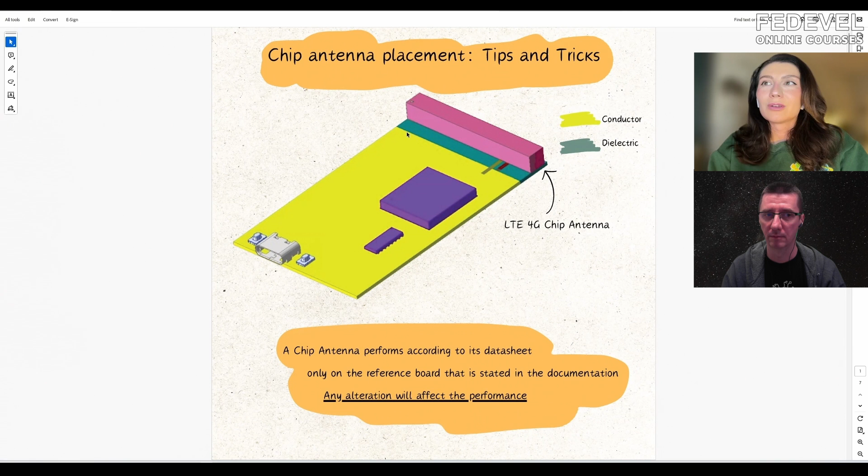We have this antenna in simulation, the box of the antenna, and the reference board that they recommend in the datasheet. And here comes the first very important thing about chip antennas: a chip antenna only performs according to the datasheet when placed on a reference board that is specified in the datasheet, and also when placed exactly as specified. Any alteration that you do will affect the efficiency and performance of your antenna.

Okay, I would like to interrupt you here. So it basically means when someone buys a chip antenna and places it on the board, they will be like, oh, I placed the antenna on my board. It's not so simple. It's not like connecting external big antennas.

Exactly, you're completely right. That's why I always really want to warn people about chip antennas, especially those who are maybe a bit far from antennas, just some engineers or amateurs who want to have some antenna in their device, and they think that a chip antenna is very good. You can buy an antenna that claims it works, for example in this case LTE 4G antenna on the dual band, but then you really need to read the datasheet.

So in this example, today -- last time we were talking about Wi-Fi and Bluetooth, and today we are talking about cellular antennas -- we will see very good effects of everything I'm talking about, like PCB effects, some environment effects on the antenna, and we will also see it on the dual band antenna, on a lower frequency, and how everything affects the higher frequency as well.

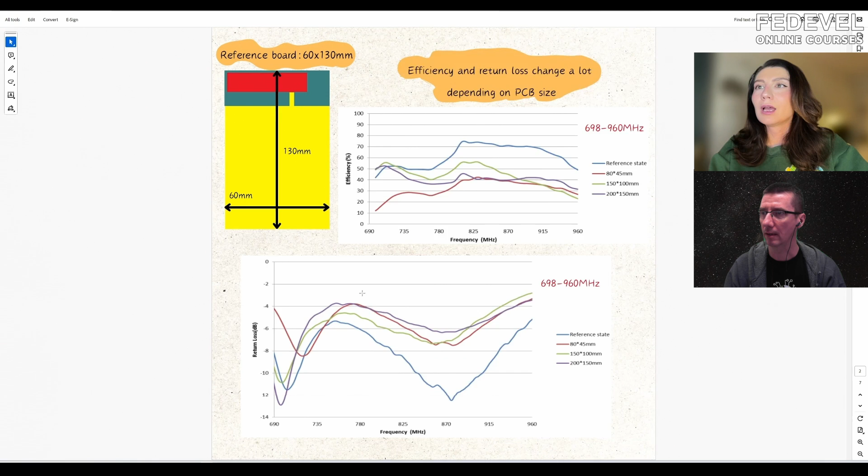So how is it possible that this one antenna can work on two different frequencies? Is it some kind of special antenna? What is inside of this antenna? There are a lot of multiband antennas, and PCB antennas also can be designed to be multiband.

It's not magic - you just need to have several resonances happening in your antenna. So it's completely normal to have several. You can have even 3 bands in one antenna. Of course then it gets harder and harder to match every band to work perfectly, but that's another challenge.

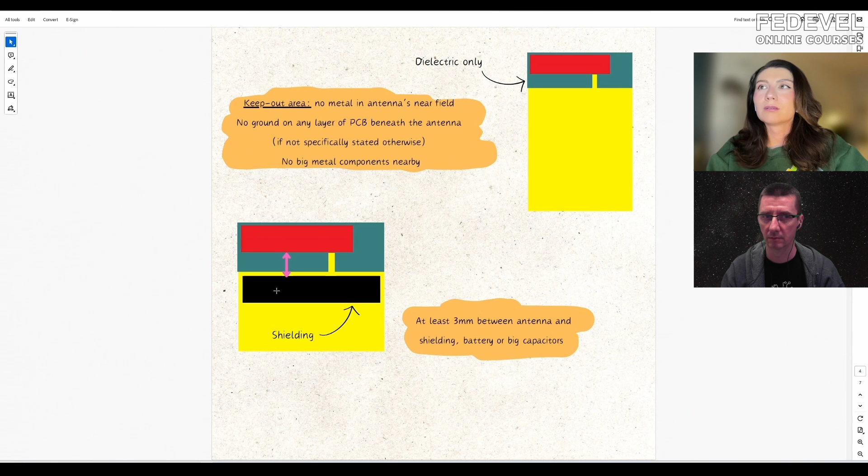So yeah, it's really just check really carefully the datasheet when you deal with a chip antenna, and as well you really need to be cautious about placing any metal elements like shielding, batteries, big capacitors, or other metal elements near the antenna. At least several millimeters should be between your shielding or battery and the antenna, so it's not in the antenna's near field and does not disturb antenna performance.

And best placement for chip antenna, usually for this type of antenna, when you have omnidirectional radiation pattern and when you don't have any ground plane beneath the antenna, the best placement is in the corner on the shorter side of the PCB.

So here we have our PCB, no metal here on the blue area, metal here on your ground plane or on your PCB, and then we place the antenna in the corner, this corner or this corner. This is considered the best and most recommended placement from any vendors. Usually all vendors who do similar types of chip antennas recommend this kind of placement, because then your antenna can radiate using all the length of your PCB.

And here you can see some not optimal solutions. In this case, the antenna is placed on the edge, but on the longer side of the PCB, compared to here on the shorter side of the PCB. So it cannot use the whole length of the PCB to radiate more efficiently.

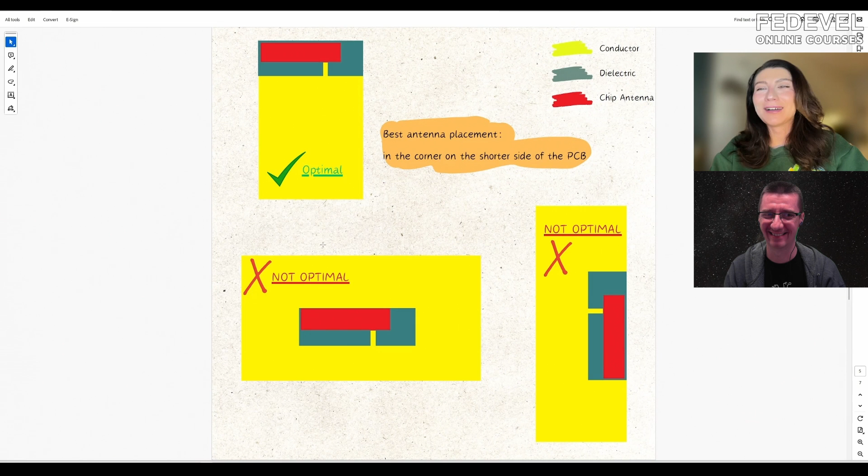And in this case, it's just funny for me, because why would you place an antenna like this? But we have seen this. Yeah, so with the PCB antenna, yes, unfortunately, but I haven't seen it with the chip antenna yet. Maybe after this video, I will be surprised again and see some other.

Yes, okay, and talking about feed, most of the antennas that exist, the chip antennas, they all match to 50 ohm, and they require your feed to be 50 ohm.

So if you don't have 50 ohm feed, then you will have losses, and you will see it on your return loss, this graph that we looked at before. That will just result in more reflections in your system, and will reduce efficiency.

Sometimes when you have your antenna, it's worth having a matching network, so placing several components before the antenna. Here we have the feed of the antenna, and we place several components in our matching network. It helps to tune the antenna back a bit.

So if we change something, add some enclosure plastic, or change the reflector or change the position, it can help, but it's not some kind of super saver, a miracle. It only helps a bit, and it's very limited, and it will bring losses to the system. So that also needs to be cautious about, because every element, nothing comes free, right? So every element has losses as well.

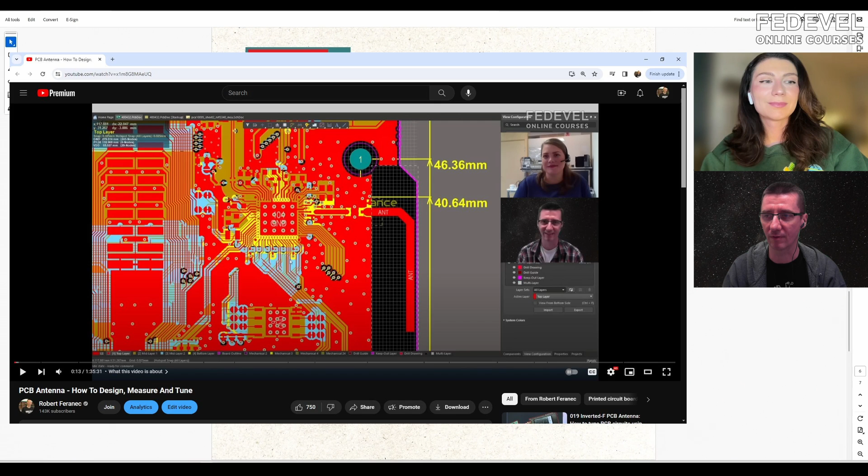Yeah, that's good. I mean, that's also always good to learn more about these matching networks. It sometimes helps a lot with antennas. And here we have some examples of what a matching network can look like. Oh, you have a few things here. Yeah, okay.

Just one minute about that. So for a simple antenna, one band, for example Wi-Fi, Bluetooth, GPS, or so, we can sometimes get by without any matching network if the antenna is simulated and done in a good way. Then we can get by without anything, and sometimes it's like 1-2 components required in the matching network.

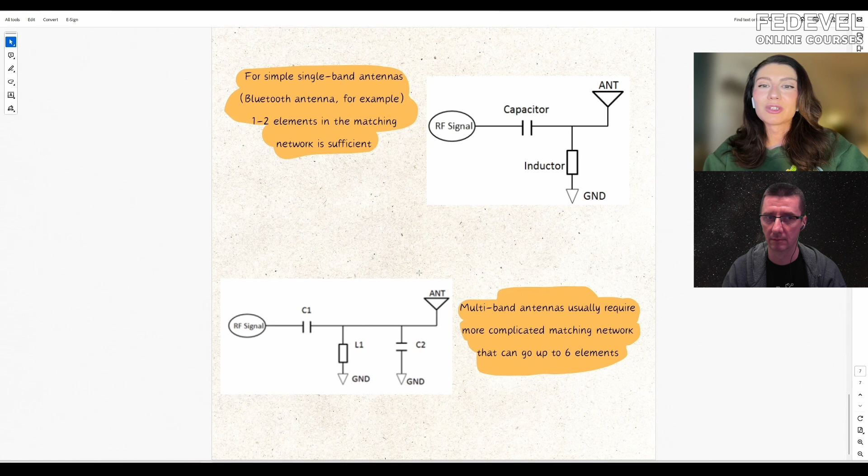For multi-band antennas, for example this dual band 4G antenna, a bigger matching network is required. Usually it's, I would say, 4 elements, sometimes 5, because we need to really match both bands. It cannot be just one band matched well and then another band suffers from that.

So you really need this capacity in your matching network to accommodate both bands. Now we can go to simulations, we'll talk about this a bit later. In the beginning we have our simulation that I just showed, with the antenna on the reference board. What they recommend to have, right? They recommend to have...

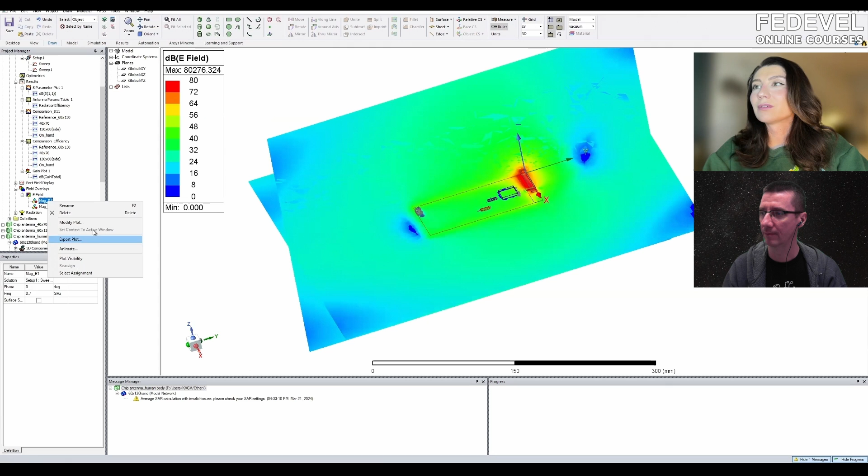130 here in length and 60 in width. Can I interrupt you? So where did you come up with these numbers? Do you have a data sheet we can look at, or what?

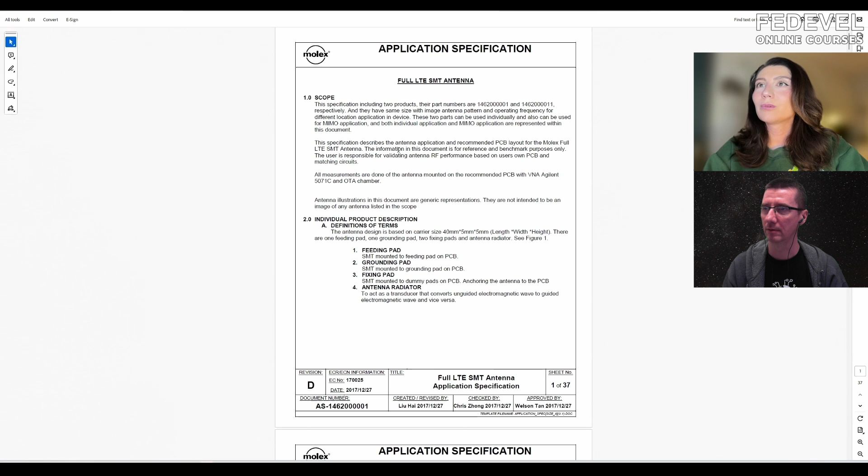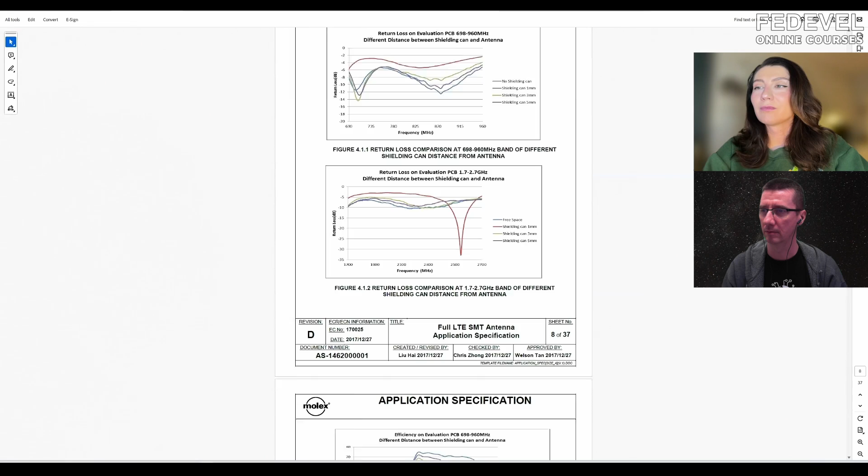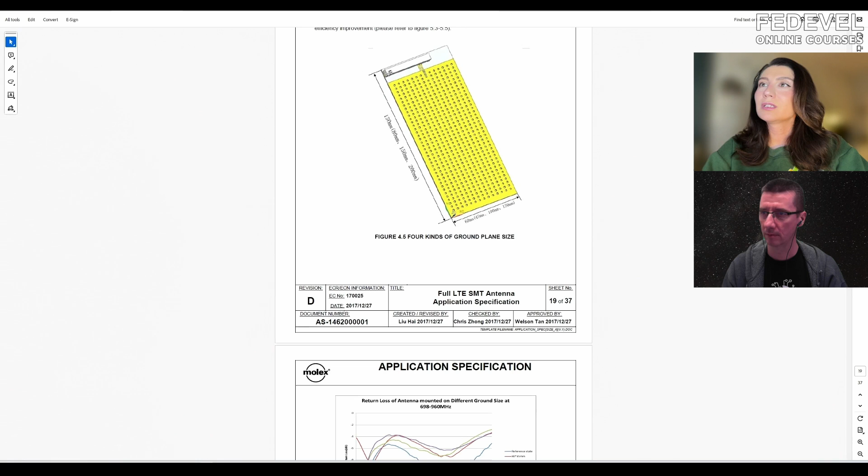Oh yes, right, they have a data sheet for this antenna, and they specify a reference board always for every antenna. They have reference board, radiation patterns, everything here. In this case, for example, they have 130 as reference and 60, and they also specify how much keep out area you need to have here. So this is a good application note.

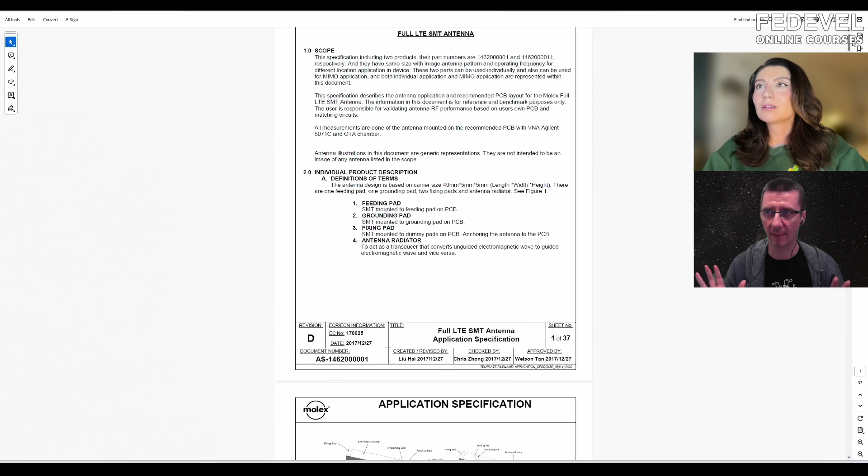So when someone is selecting a chip antenna, they should go with a manufacturer with good documentation. Yes, for sure. So here, for example, they have these 2 antennas, double in width, because they have a MIMO application.

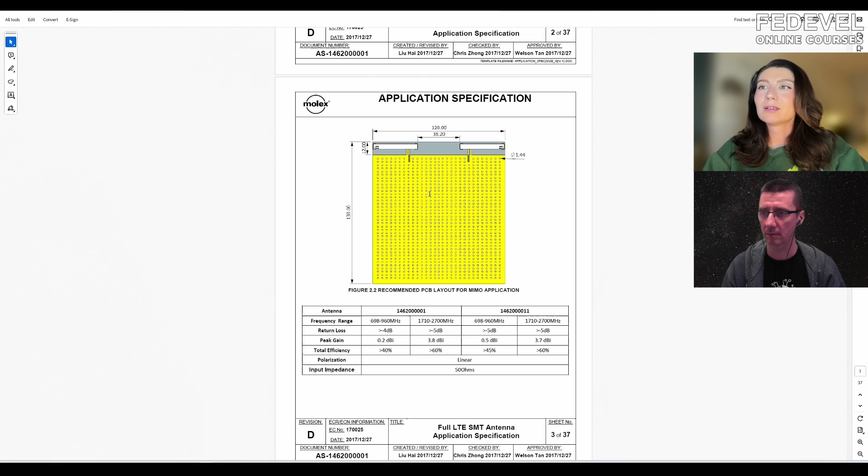But we only have one antenna, so we have 130 and 60. And here they have all the parameters, they have keep out area of 12 here, and I took all this data that they have and just put it into the simulation here.

So here I have my PCB, and I have some chip, and here this is just dielectric. This is the Molex antenna that they provide, the model they provide. So they provide the model? Yeah, they provide the model, you can download it and simulate.

That's very good that they provide the models. It's quite usual now for vendors to provide models, because as you might already have a hint, it's quite tricky. You cannot just place it on everything, you need to simulate if you have the software. So this is what they recommend: the placement, the keep out area, the size.

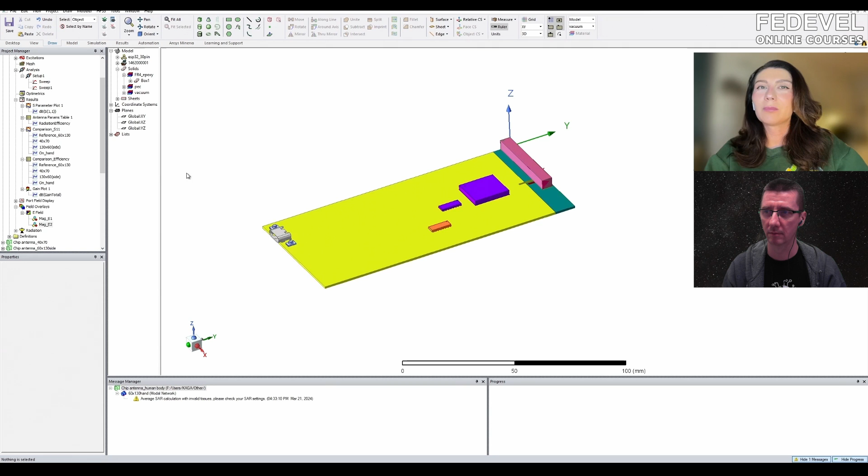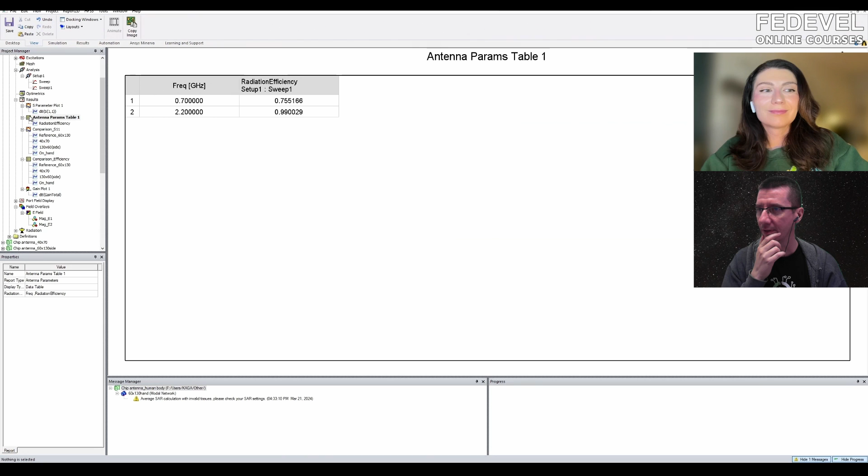And it means the antenna is going to radiate on these frequencies which are at these lower points. Yes, exactly, where we have lower points, this means the antenna resonates at that point. We need to have two resonances in order to resonate on both frequency bands.

And here we can see efficiency. We have two frequencies - I just took one frequency from each band, 700 megahertz and 2200 megahertz. And we have 75% and 99%. Yes, 99%, this is very good.

It's very easy to achieve this good efficiency on a high band, it's never a problem. I designed a lot of these - well, not chip antennas, custom antennas - for cellular, for 4G, for LTE, and it's never a problem to have good efficiency on the higher band. It's always a problem to have something good with the lower band. So it's not surprising here.

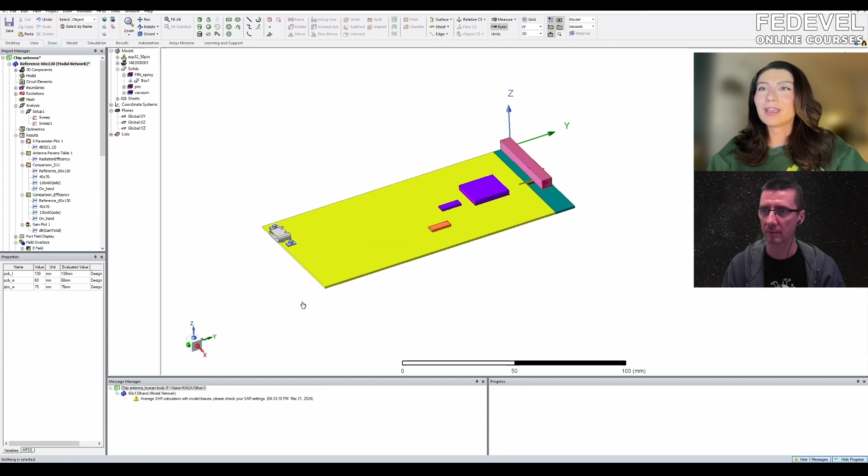Also pay attention that this is a very, very easy setup - we don't have any enclosure, nothing around, this is just free space, so we don't have any losses here. Of course it won't be the same in real life. If we want really accurate simulation, we need to add an enclosure, metal batteries, flexes that we have, and then we'll have a more accurate and realistic simulation. But it's actually realistic to have 80-90% efficiency on that higher band, so it's not a problem.

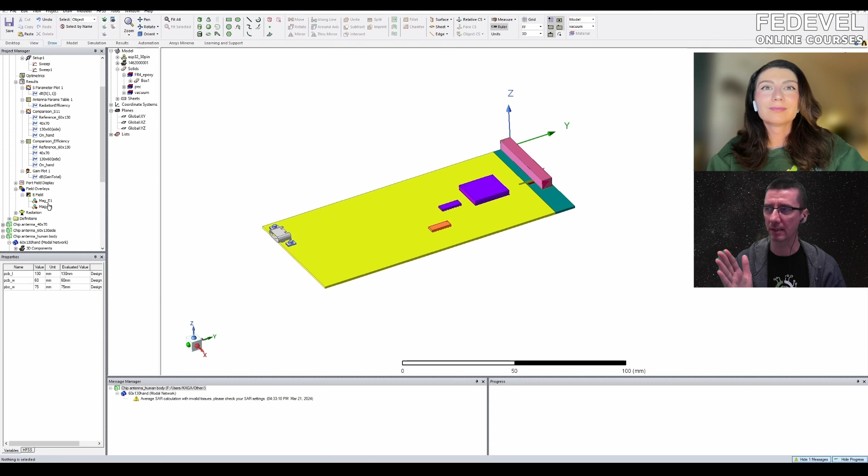I'm just curious - does it still work okay? Because this higher band is using multiple frequencies, it's not going to use exactly the one which is in resonance, correct? I have no idea how it actually works.

What do you mean? That's because there is a range of frequencies, like a big range. You mean that it's kind of quite wide band? Yeah, I mean here for efficiency I took only one point.

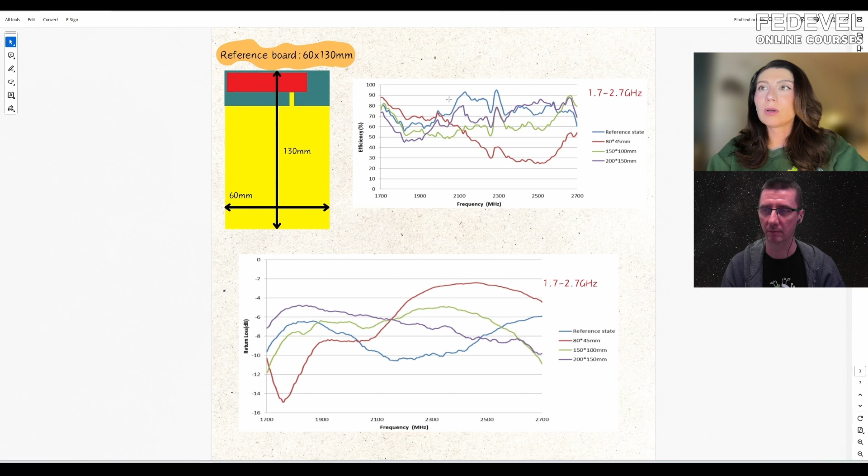But for example, if we looked at this graph, here we have efficiency over all frequency bands - 1.7, 2.7 - and for our blue line that is reference, it's quite good over the whole band. So yeah, it just takes more time, that's why I don't have all these points here, but I mean, to simulate...

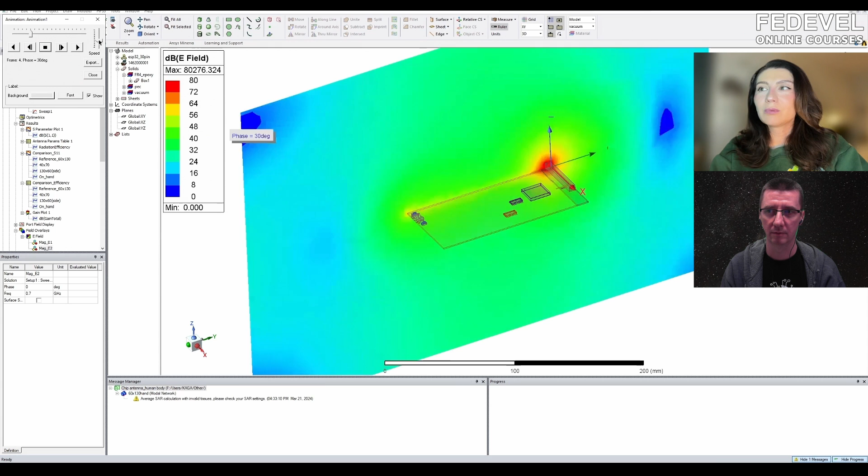I asked because there is only one very small peak. Yeah, that's why you need a matching network to have it kind of broader. So basically what we see here is raw antenna impedance without any matching network, just fed with 50 ohm to the antenna, and what we want to see here is that it resonates close to where we want. Then when we have our matching network, as I explained before, like 4 or 5 elements for this application, we will try to achieve good performance over our broadband.

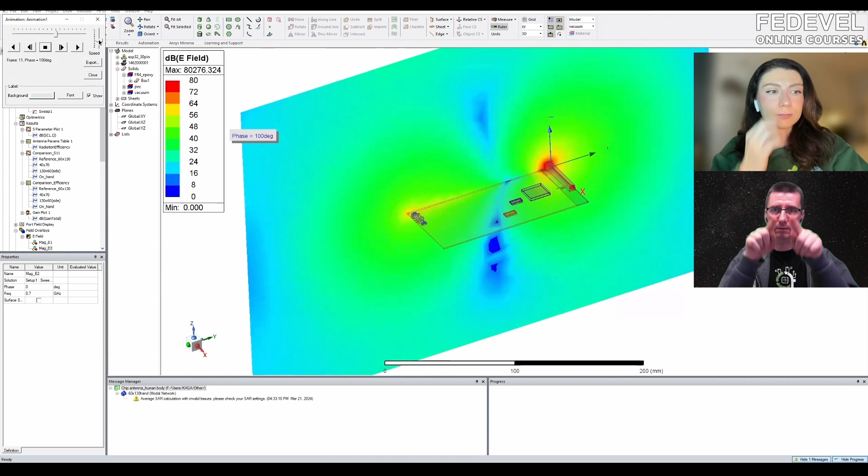So from 700, you can change the peak to be a little bit wider. Wider, yes, exactly. Not as deep, but wider.

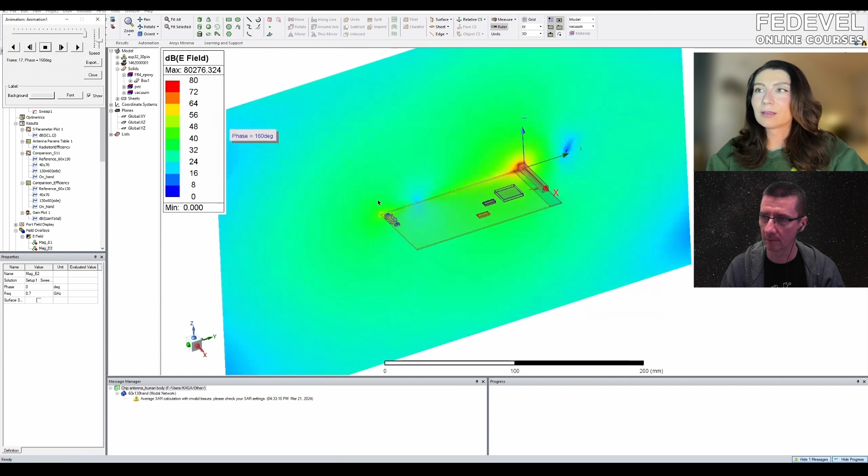Yes, and here we can see how the antenna field looks in the ZY plane. Here you can see this box is our antenna, but it actually also resonates using the ground plane. The red is the peak of radiation, the peak of field.

So here you can see it radiates here, and if we see it on our YX plane, we can also see that it radiates using the ground plane. That's why it's very important to have an appropriate ground plane for this application.

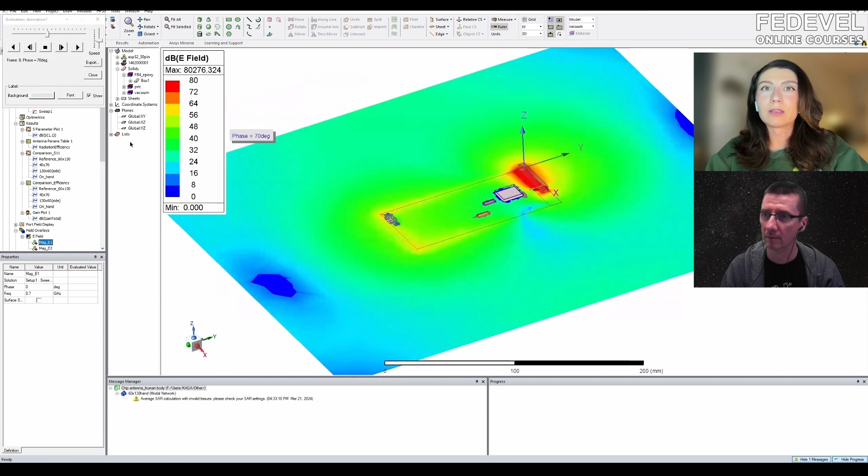And okay, so that was the reference, right? Quite good, not bad. And if we go to our smaller boards, this one is 40 by 70. So we still have our antenna fitting perfectly here, the same position as they recommend, right?

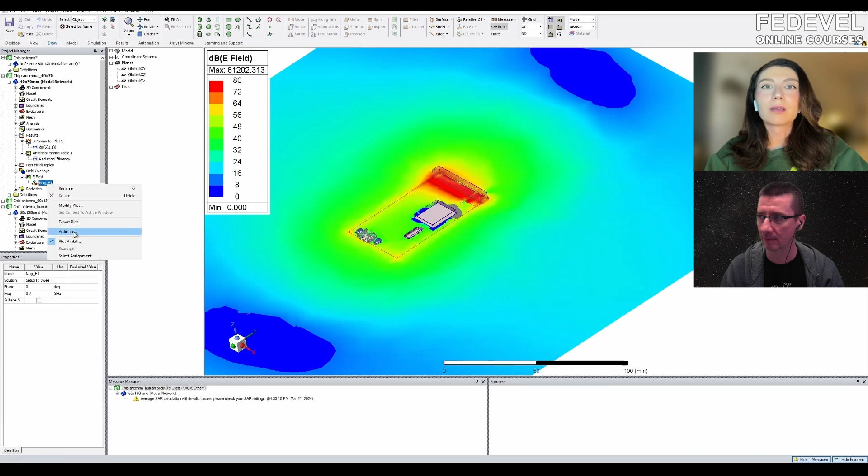And the same, maybe I need to... so clearance is the same, everything is the same, but smaller ground plane. So what we can see here is that it still resonates around where we would expect, but you can see something happening, like it doesn't look exactly like it used to before, right?

But if we just look into return loss, then I would say okay, this is fine, we still can tune it. But if we look into efficiency now, this drops to 30%, and it used to be 70.

As I said before, if you remember, this is especially critical for lower frequency. It's not so hard to achieve good performance on a higher frequency, but on a lower frequency - because lower frequencies have longer wavelengths, so they need longer ground. Yes, to radiate, because we have this correlation that ground plane should be around a quarter wavelength, and if the wavelength is longer, then the ground plane should be longer.

So this is already not so good, we dropped quite a lot, more than double here. But what if we have the same board, but on the side?

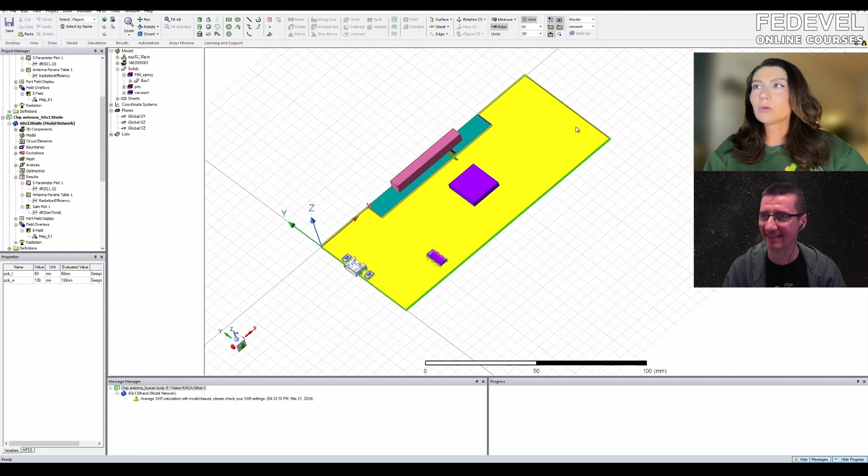I'm curious. So here we have the same board, 130 by 60 in width, but we place our antenna on the side, and we have also a good keep-out area as they recommend. All this data is the same.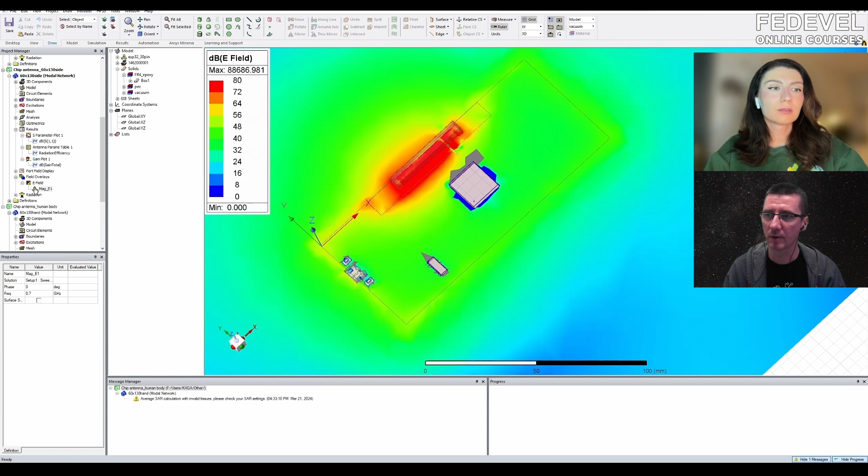So how is this efficiency calculated? Efficiency is basically like the total power we radiate, compared to the input power to our antenna. So there's some kind of calculation behind it, and then it just gives you this number.

This is interesting to see compared to the previous animation, because remember, I mentioned that we radiate with our PCB as well - it's not only the antenna that radiates. In this case, it's the same. We can see that our antenna doesn't use the whole length of the PCB. So it tries to radiate with this ground plane, but it kind of radiates only with half of it, because it feeds from here, and then we have fields that try to radiate with the shorter side of the PCB, and it doesn't radiate so efficiently as we would like.

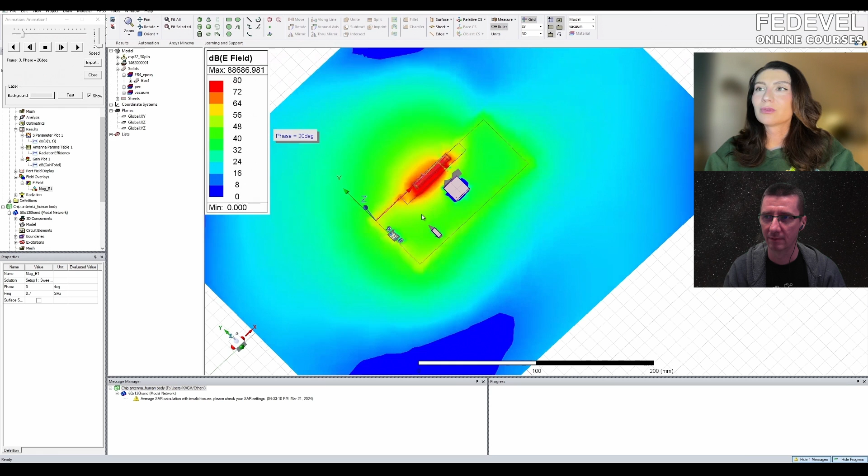That's why we lose more than half of our efficiency. You can see it radiates here on the side, yellow, and because the edge is short, it means it can't radiate, and we are expecting like a longer wave or something - that's why. It kind of tries to radiate with this shorter edge, but then it doesn't utilize the whole length of the PCB. So the field goes like this, the shorter way. That's why we don't see it properly.

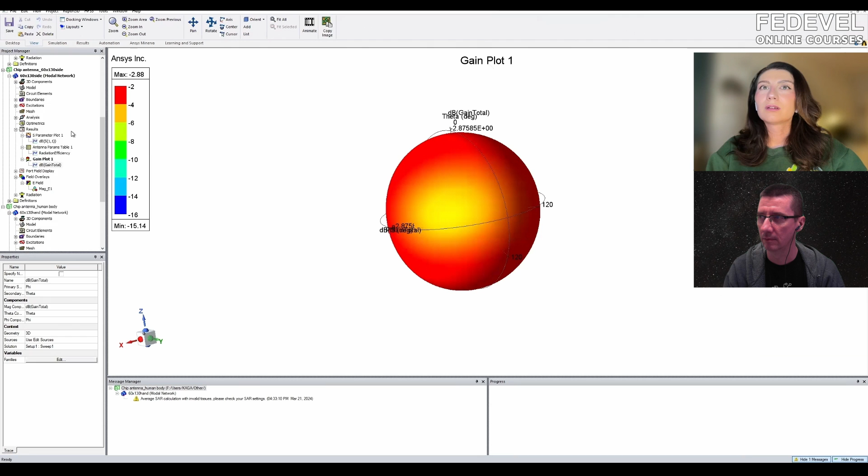And also we have a change in radiation pattern. If you remember from last time, we want to have this donut shape, right? This is our reference board, a perfect donut shape. Donut shape means that it just radiates around the antenna everywhere.

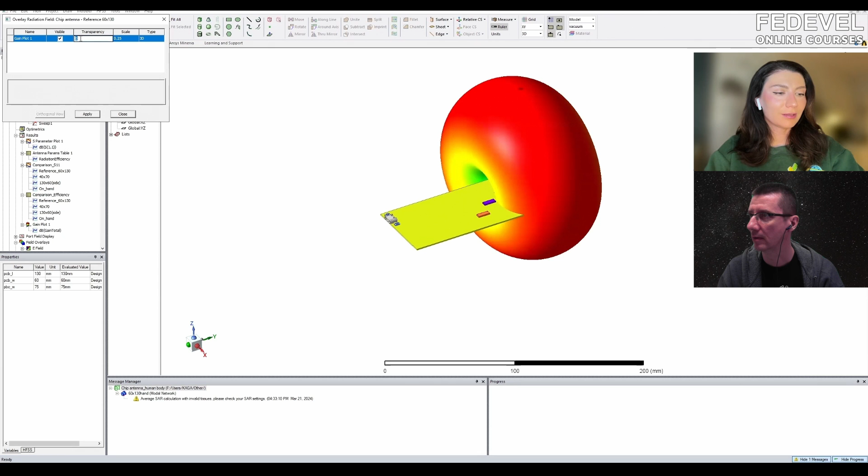Can we show the board? So yeah, our antenna is... you can put 50, put there 50, so we can also see the board a little bit. Yeah, maybe. Sometimes, but I think 50 is too transparent. I don't know, it doesn't work logically.

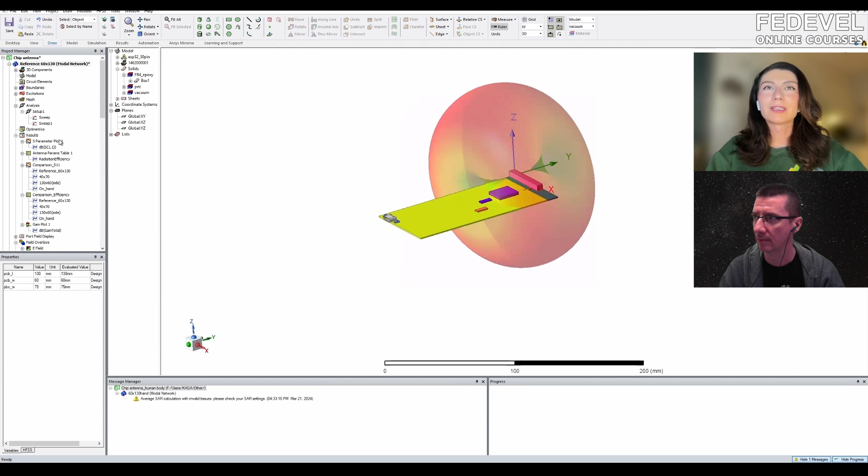So okay, here's our radiation pattern on the antenna. You can see that it radiates around the antenna all around, right? Like a perfect donut shape - that's called donut radiation pattern. So in our field, if we go to the side antenna, it has kind of a donut shape, but in this side, we don't have this null that is supposed to be in the center. So something sketchy is happening already from the side of it.

And then when you go here, you also can notice that the gain is negative. We don't usually want to have a negative gain - why would we want that, right? We want positive gain because we want to have gain in at least some direction here. But because the losses are so bad - and what is gain, right? Gain is directivity of our antenna minus losses - and losses are so bad in our 700 megahertz frequency in this antenna that we have negative gain, and we have such a low efficiency, exactly as in this small band.

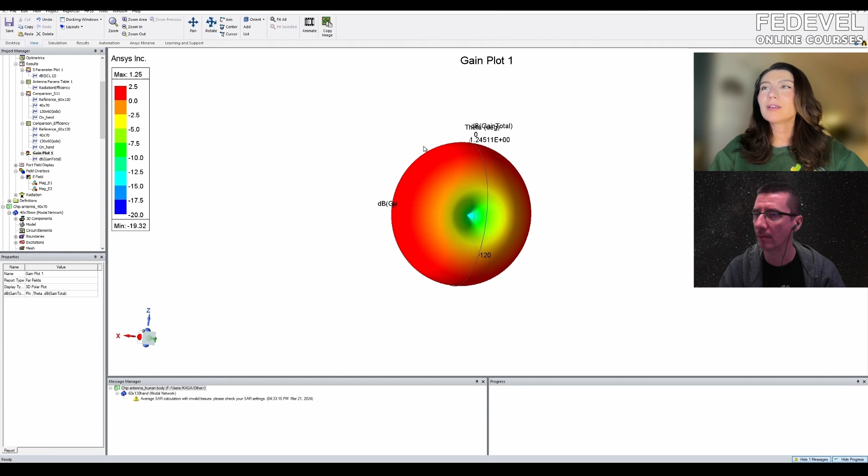So how does the gain look in the good one? The gain here, we have like 2.5 - well, 2.5 is maybe the red one. Yeah, it's the red one. We have actually a maximum of 1.2, but that's okay still for this kind of antenna because it's omnidirectional. You don't have one peak where you direct all your gain - it's omnidirectional, so gain gets spread all over the place. So we don't expect high gain here, but at least over zero, a bit over zero.

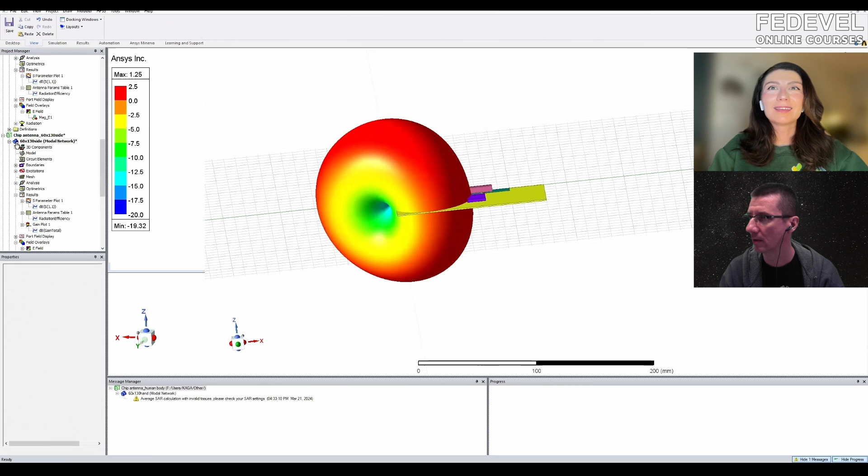And the other one, I didn't know what the maximum was there. Yeah, I guess it was this one - yeah, it's minus. So that's also why you should really be cautious about where you place your antenna, because you lose efficiency, you lose gain, you may have some losses, you may have some detuning happening, and so on.

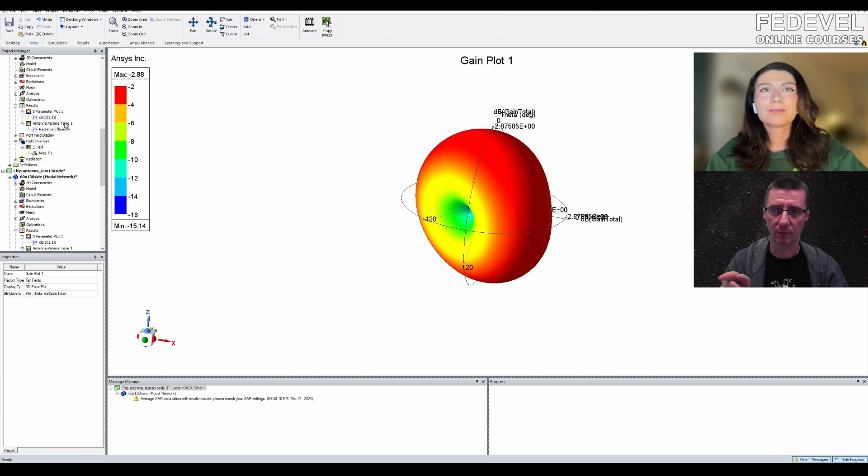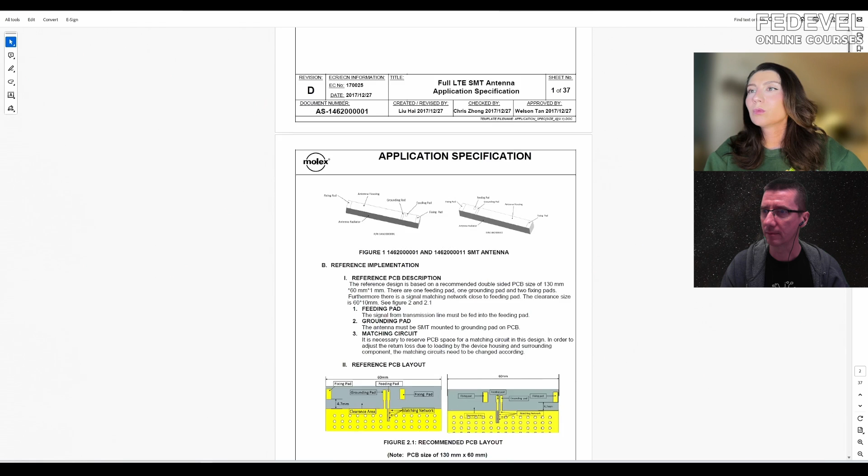Okay, so I'm going to interrupt you now. When we are talking about this, can we go back to the application note, because I think there are some graphs and I would like to just explain the parameters. Radiation graphs, okay, down - radiation graphs, okay yeah, here I think they have these radiation patterns.

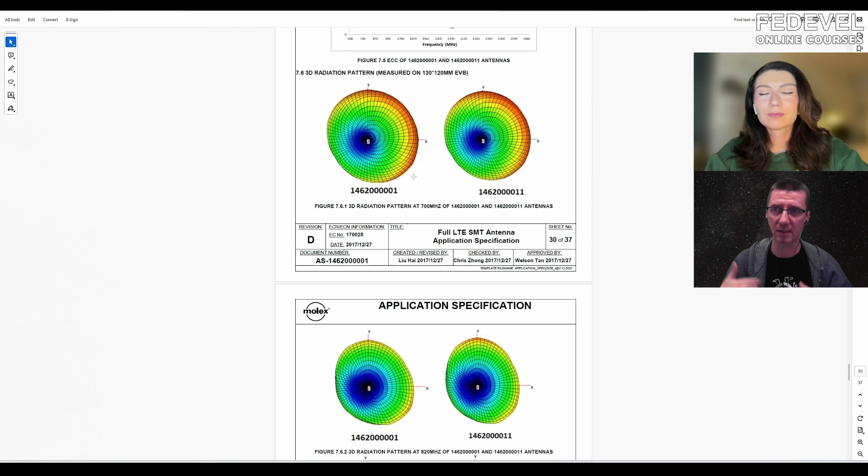Oh okay, so this is exactly what we could see in the simulation. I would like to talk about this a little bit, because normally people will see a datasheet, and in the datasheet they will see this radiation graph. I would like to be sure everyone understands what this means. In every datasheet you would have a radiation pattern made in simulation, as I showed now, and as well on the reference board in the right position where they intend this antenna to be used. And here we have this donut shape as well.

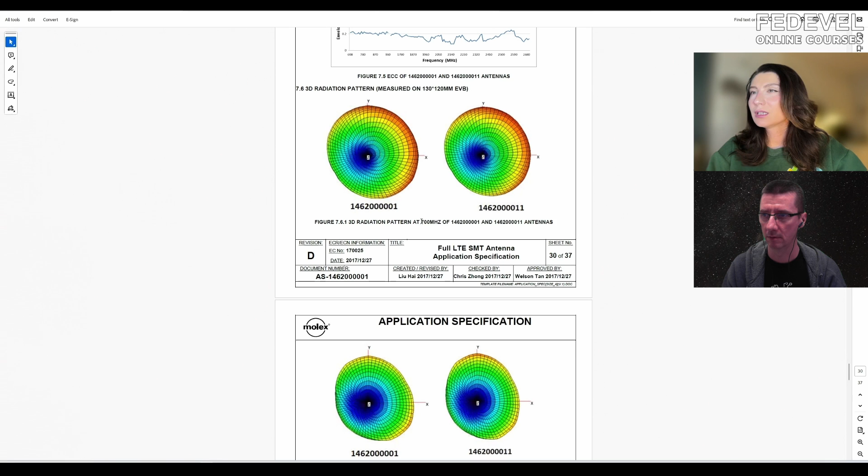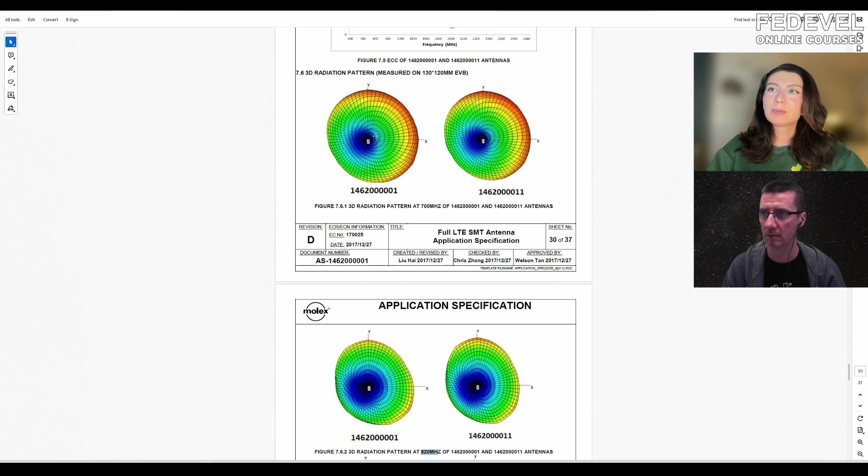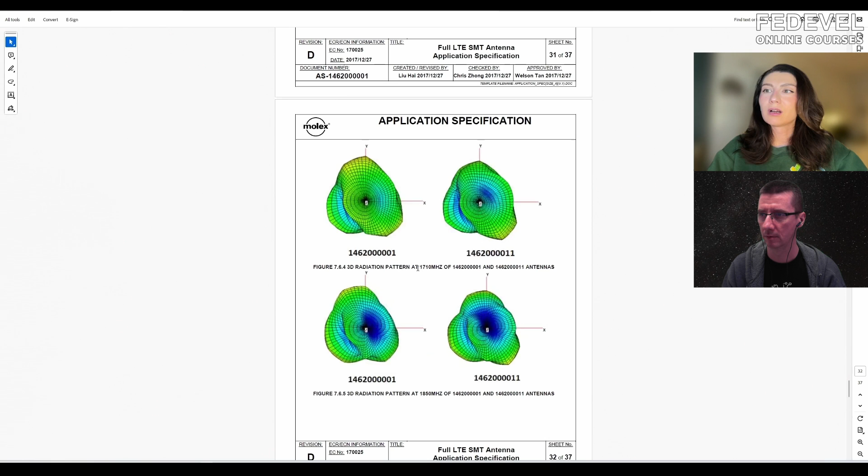Maybe, well, it's 700 megahertz here for example, and here 800 - it also depends on the scale they chose for the antenna. That's why we see somewhere more green, somewhere gray, but the shape is round, right? So our antenna is placed here where we see null - the blue is like null, and then it radiates around itself. That's exactly what we saw now in the simulation. And here it's on a higher frequency, so it becomes a bit less round, but it's still supposed to kind of cover a round antenna pattern.

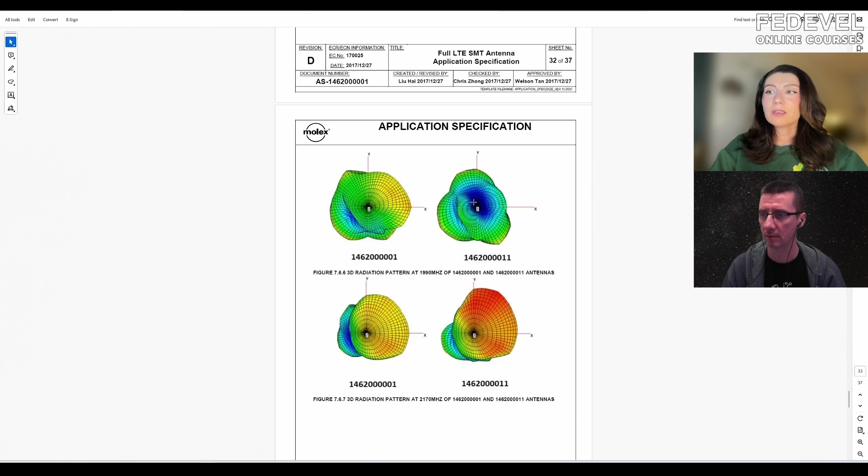Yeah, this is very good to check and to see what you expect. But this works exactly as intended only on the reference board. Can we also have a look?

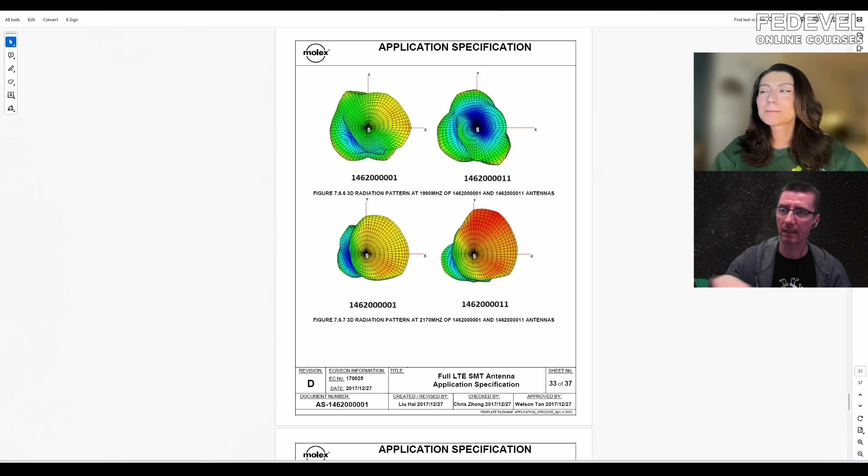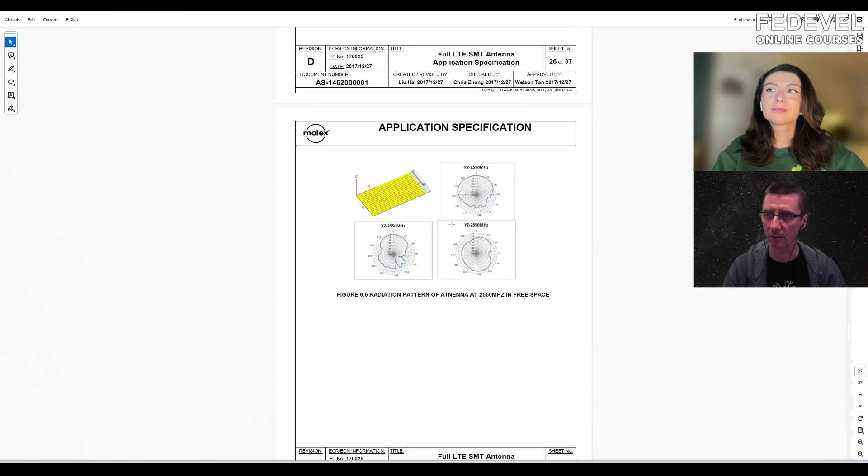I think there are also 2D diagrams, not 3D, so we understand these too. Yeah, here it's 2D. This is basically cuts, here you can see the axis of how the antenna is placed, and then you have your 3D pattern that I showed just now, and you cut it into different slices - X, Y, Y, Z, X, Z - and then you know how your radiation looks in this plane. So I hope everyone now understands what these graphs mean.

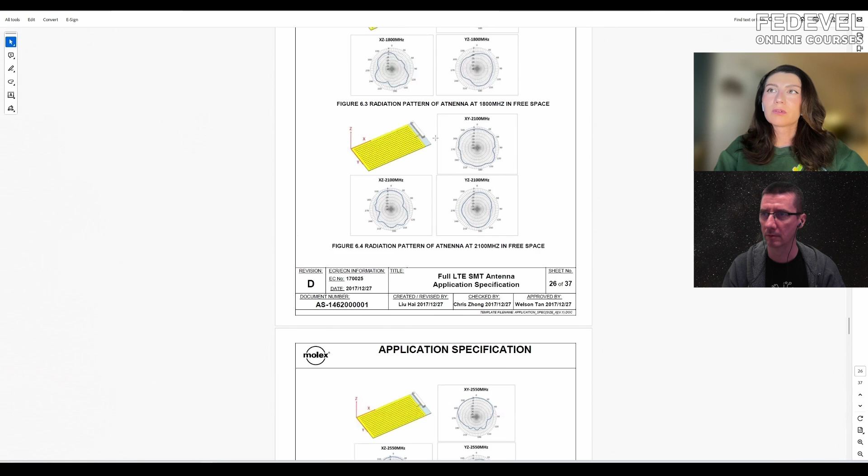So for example here, the XY cut is kind of round, and if we want omnidirectional, we need something like that which gives a semi-round shape around. Here we have some nulls because in this XY plane we have this null. If we cut through this null, we get this figure-8 shape. So these are the expected graphs and cuts for this.

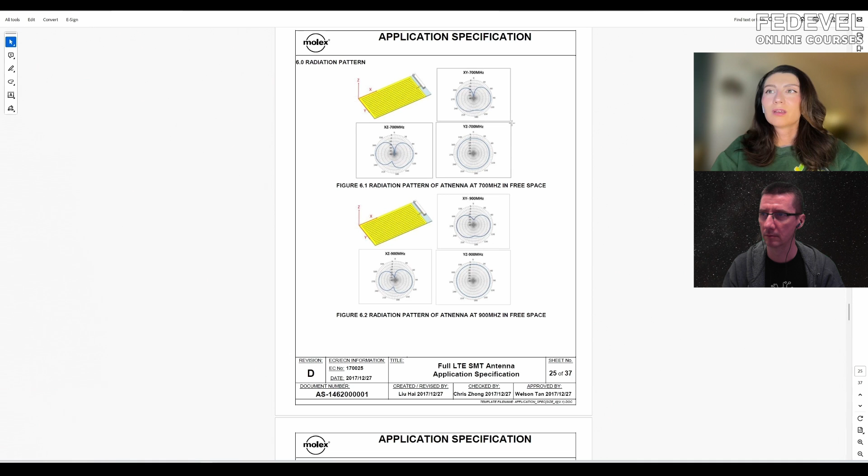You can get the same in simulation if you have it. If you don't, you just look for this in the datasheet and apply it to your application if you want these radiation patterns.

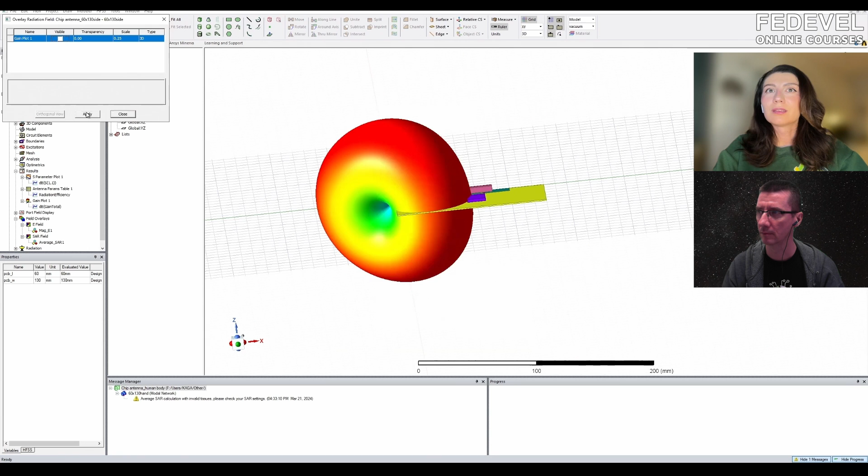Okay, we can go back to the simulation. As I said, what we look into now is just the antenna in open space. We have our antenna, and nothing happening with it - it just radiates as it wants in open space.

I wanted to have an interesting case, to think about what happens if we design an antenna for a wearable device, and we want to place this antenna somewhere, not necessarily on our palm or our hand, but maybe on the body. Human tissue is still kind of similar, and it will affect the antenna a lot.

I've designed a lot of antennas for wearable devices, and in these cases we always need to simulate and then test when we manufacture our prototype. After that, we test antennas always with this environment - on human tissue dummies, special dolls and things that imitate human tissue - and we measure with it in the lab, and we do the same in simulation.

So what do you think happens when we have human hands? What is human body? Human body is a dielectric that consists a lot of water, and water is a very lossy dielectric. So what happens with our antenna when it's placed into a very lossy environment? Well, obviously it will have some unexpected losses that we don't have in open space.

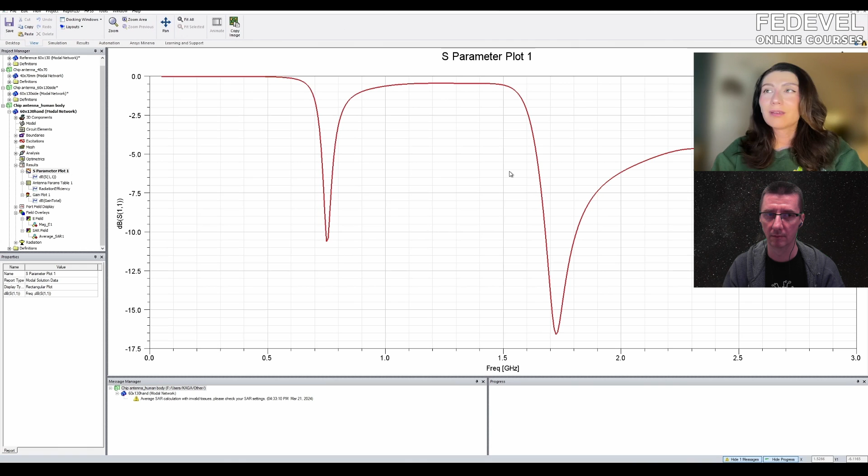We can even think that okay, maybe our antenna works perfectly because we have such a good return loss now, right? And then we look into our efficiency, and we have 10% efficiency when placed on the hand. If you remember, when we changed a lot of things with our PCB, even with a small PCB at higher frequency, it still stayed at 98% efficiency or so - now we're at 38%, even with higher frequency. So we dropped a lot.

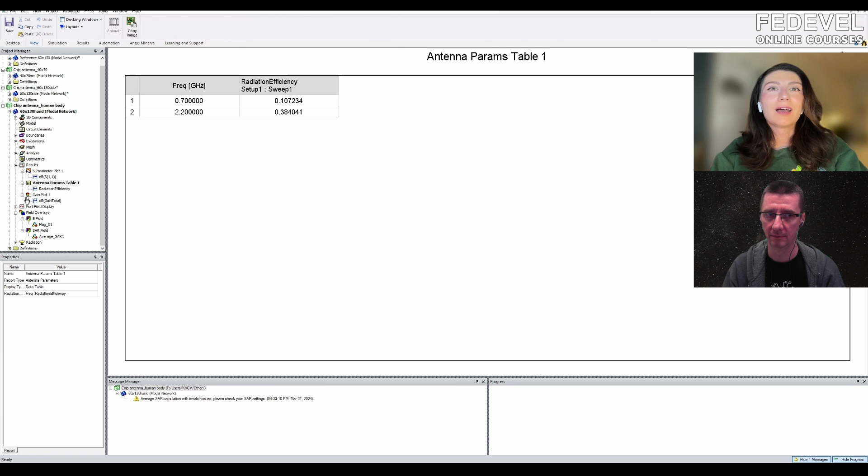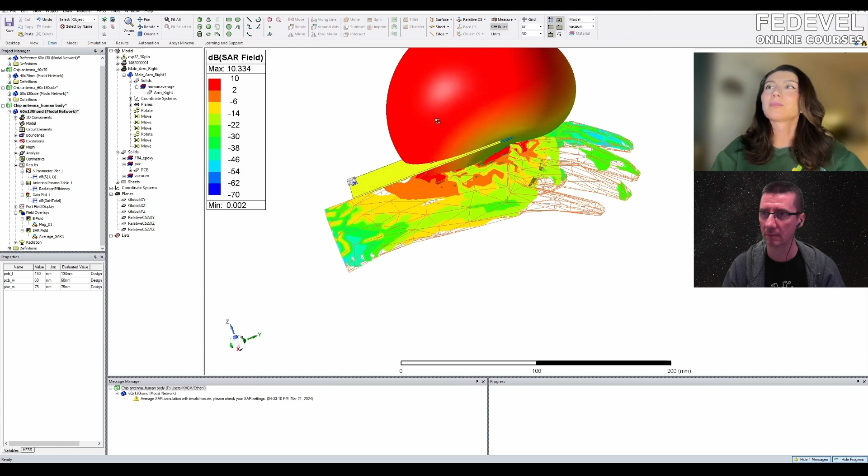And what we see here in these colors that we have is actually SAR - specific absorption rate, a bit tricky to say, that's why we say SAR. It basically shows what gets absorbed by human tissue.

And it's very important for wearable devices to have this, and it's even certified - you cannot just release your wireless wearable device without this specific certification. So there are some maximums for this SAR? Yes, there is a maximum that you need to calculate, like per 1 centimeter of tissue per 1 kilo or so.

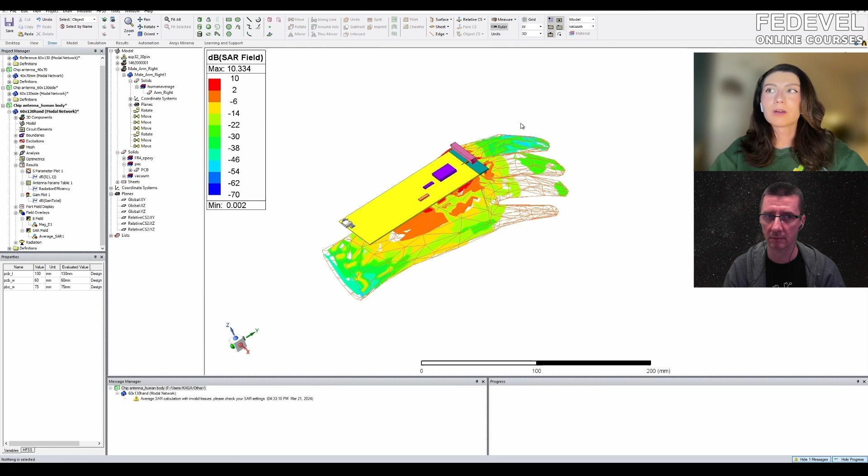So it's different for different power levels, for different output powers, but it's very important to simulate it when you work with wearable devices, to simulate and then to measure. There are a lot of laboratories that specialize in certifying devices for mass market wearable devices, to have this certification, because you cannot sell your device if it does not pass this certification.

So here we can see how red is kind of the maximum impact that goes inside our arm. What happens is this lower frequency, from 1 megahertz to approximately 10 gigahertz, this wavelength penetrates our skin and tissue quite well. It goes through us and is absorbed by our body quite well. But if we keep to these SAR limits that we have, then we don't cause a lot of issues in our body.

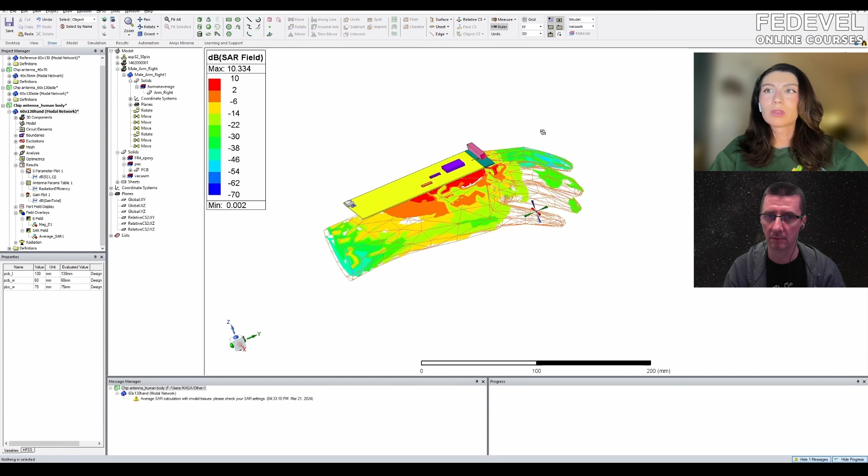So what it actually does is increase temperature inside our tissue, this radiation, right? But if we keep good, healthy limits, then we don't increase temperature by scary amounts, so that it doesn't affect us. So this is what happens, and this is also very interesting for me, that we can see this effect.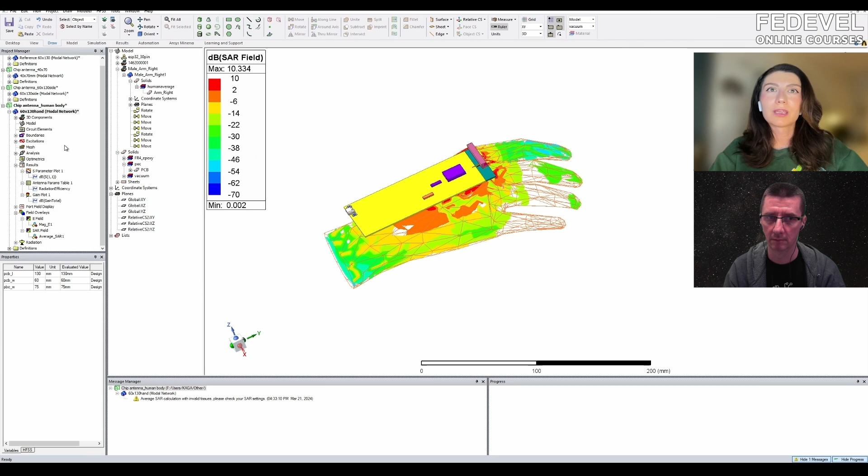So for this kind of application, I would never go with any chip antenna, because wearables is very, very tricky. You really need to think about your environment. And I would totally only go with a custom antenna that's specifically made for this application, so it would be radiating only up, for example.

Yeah, for example, a lot of antennas - if we want this kind of application that does not radiate inside our body, for example, we want to have only one direction, then we can design a different type of antenna, not this type that's intended to radiate around. So it cannot even itself radiate in only one direction, so we better design the antenna.

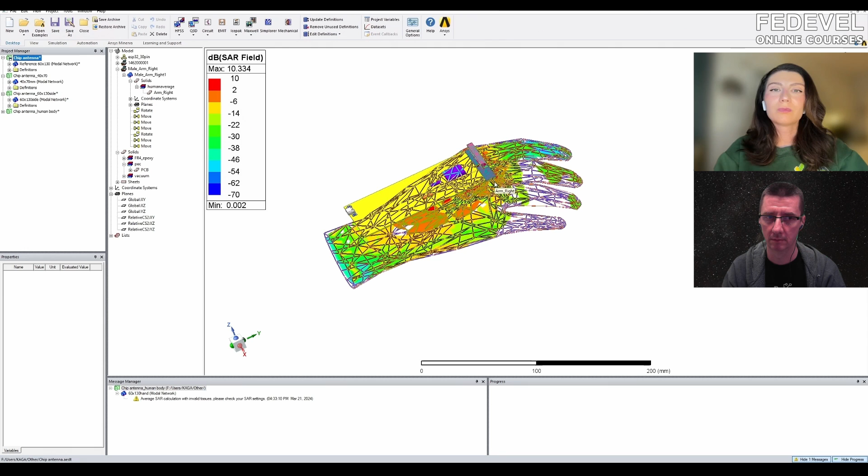For this application, it's good to have some over-ground antennas. So for example, we have full ground, and then on the third dimension we have maybe a printed antenna or a 3D antenna that goes above the ground and radiates up. In this application, human tissue even helps the antenna more, because it kind of plays a more reflective role beneath the antenna. So if you know what you're doing, you can turn every environment into something a bit helpful.

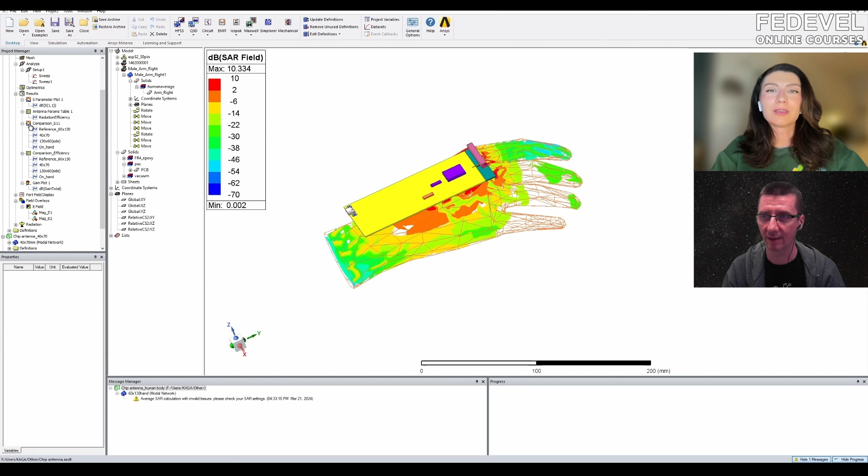But I also wanted to show a comparison with all the cases that we looked at today. So here we have parameters for all our cases, and the reference is the red one. As you can see, in every case, even the worst case with the hand when we had only 10% efficiency, we still have our resonances happening.

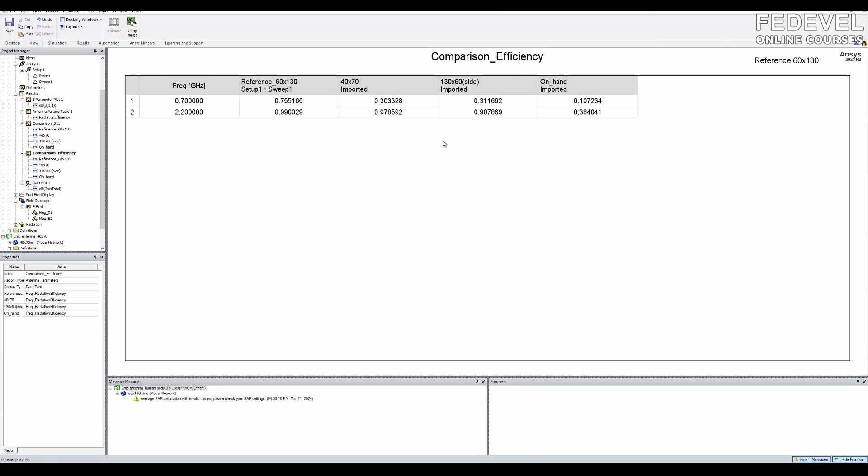So in this you cannot judge an antenna just by return loss - that's basically the conclusion from that. You have your resonances and you still get some radiation happening at those frequencies, but then what is the quality of that radiation? What is the efficiency? That we can see here. Our reference, remember, was 75 and 99% in open space.

And then it dropped to 30 and 97% with a smaller board, the smallest board that we had. And when we placed the antenna on the side, it was still 30 and 98%. And then when we had our reference board, perfect placement, but in a harsh environment on a human body, we have 10 and 38%. This is very important to point out: you can have the best board you could design, but if you place it in the wrong environment, everything is gone.

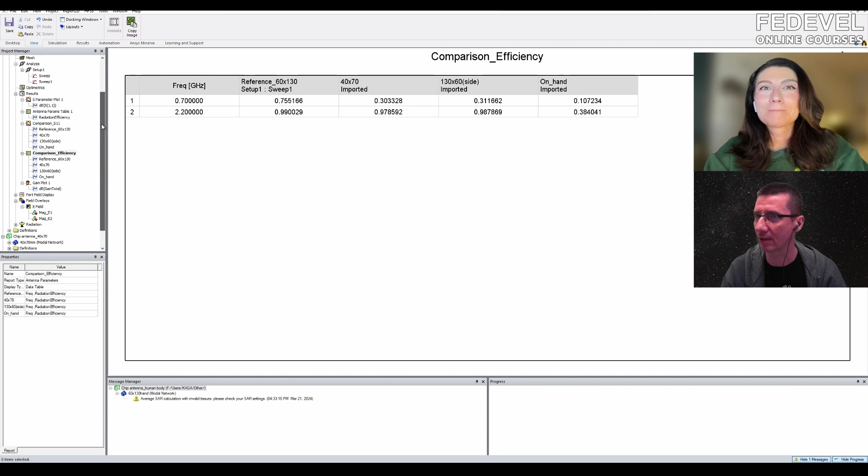You got it correctly. Okay, can we go back to the graph? So the green one was on the hand? I'm just curious.

This one? No, the graphs which you had before, the comparison graph for the S parameters. Yes, this one. So the green one, no, on hand - the green one is a small board.

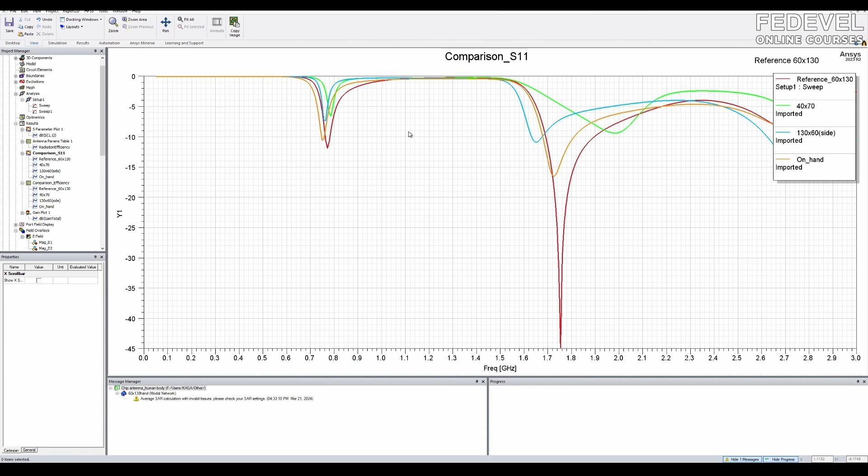So the small board, from an efficiency point of view, if we compare just the boards without hand, without environment, like in open space, and also with tuning, it's quite bad. I mean, we don't have any matching network here. It's a different story how you would match your antenna, but I can say already now that even with a perfectly matched matching network, spending a lot of time in a lab matching this antenna with this small board, you cannot achieve the same as with the reference board with good matching. So that's just physics here.

Okay, I understand, so these are all the examples you have. Yeah, but again, this is interesting - last time, what was really interesting for me to find out was that some of these environments or improper design also shifted these resonances too much. So we don't really see it here. No, we don't see it here.

Well, we have some shift here, right? It's just not so big, maybe like 50 megahertz or something. And here we have a bigger one. For example, with this green one, see how it shifted. But because it works on a very wide range, this shifting frequency is not so critical as for 2.45. With 2.45, we had only one frequency, and if we shift a bit, it's very noticeable. In this case, we don't see such a huge shift, but still we see a lot of things happening.

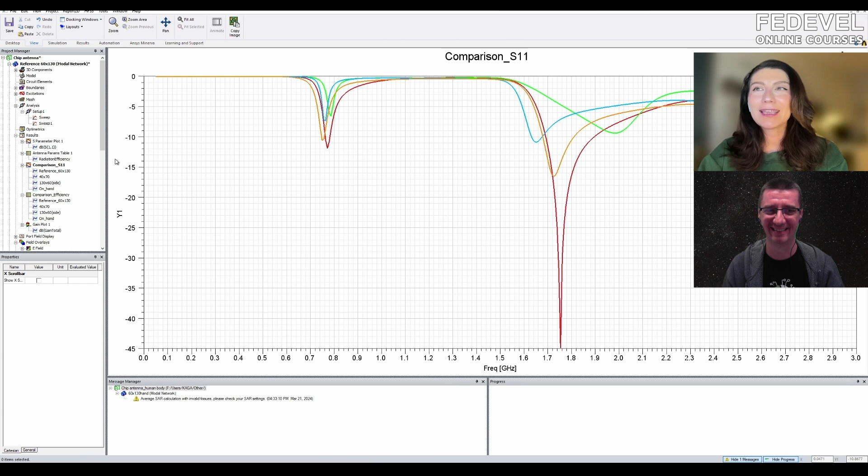No, thank you. Thank you very much, Katerina. And that's everything. Thank you very much for watching this video.